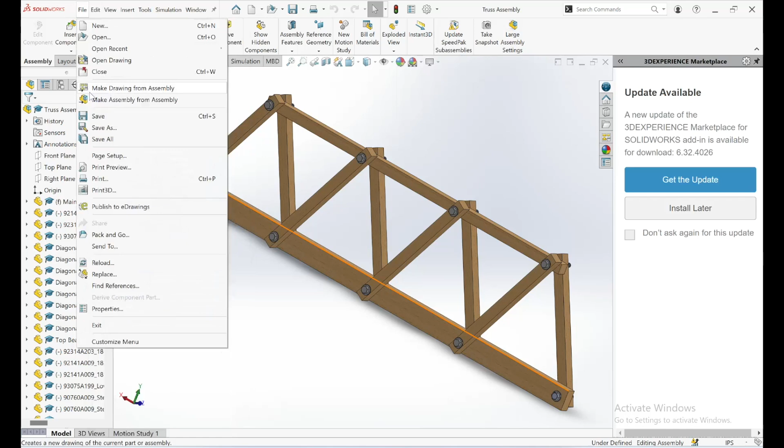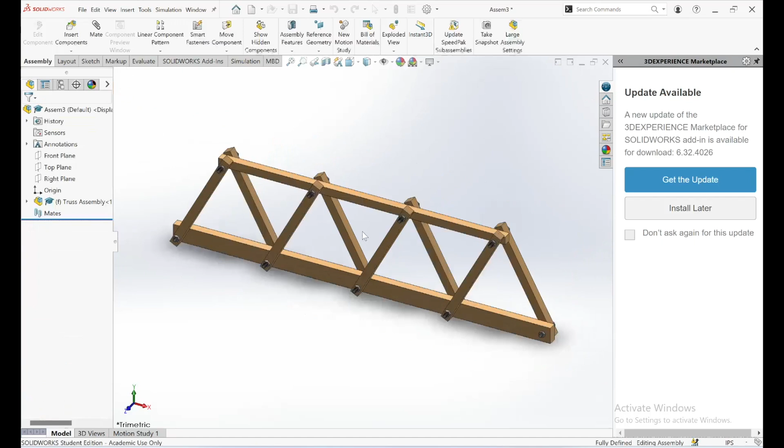So we're going to go up to File and click Make Assembly from Assembly. Once this loads, we should be able to drop the truss assembly that we had already built in the other file into the workspace. So let's go in and add another one. Select truss assembly, and let's add it in over here and press OK.

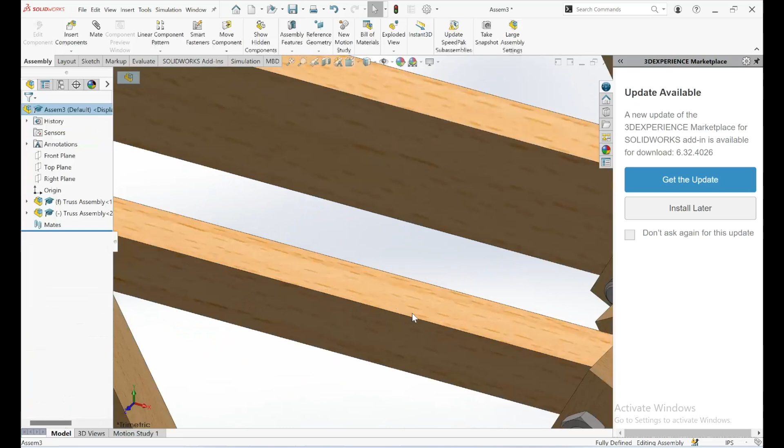Oops, so as you can see, these bolts are facing towards each other and we want them facing outwards. There's a couple ways you can do this. I'm going to start by rotating this side, clicking on the right side of my mouse and dragging, and this will give us a different view of the part.

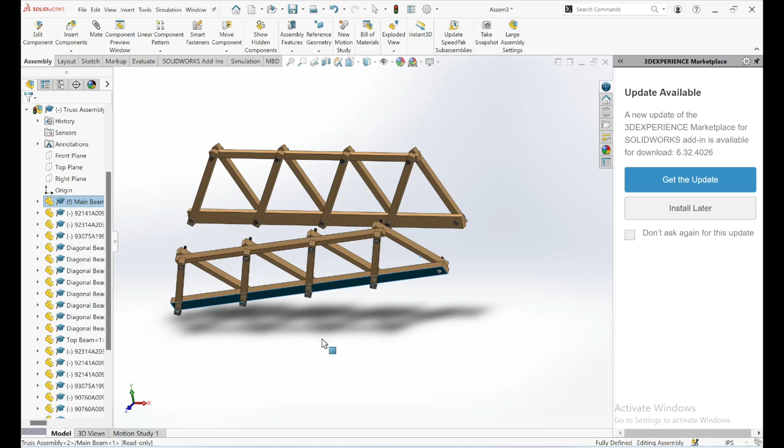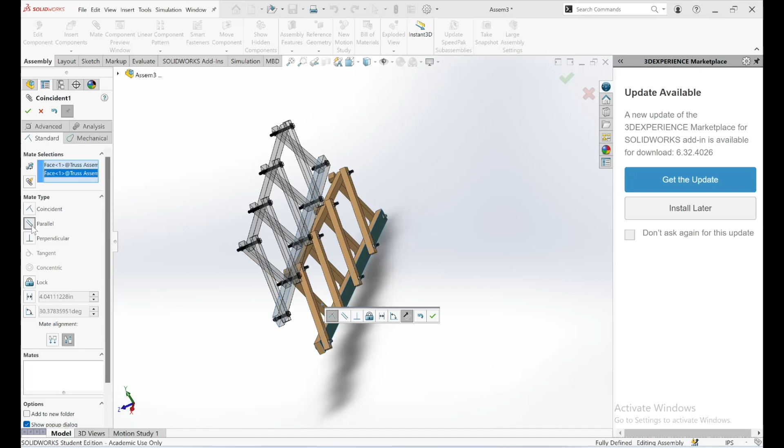Just so we can get it approximately where we want it to be, let's drag this out. Let's click this face here and mate it with the inside of the main beam on the other side of the truss. Now, one side of this truss is in fact fixed, so it won't move, but let's make this parallel, so then they'll line up like this. Click OK.

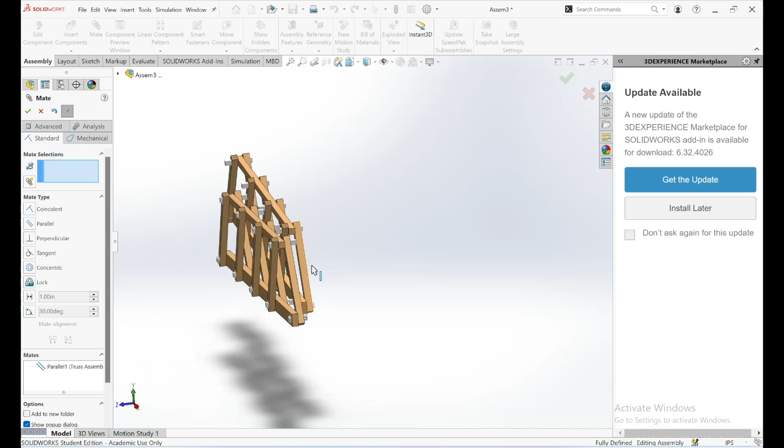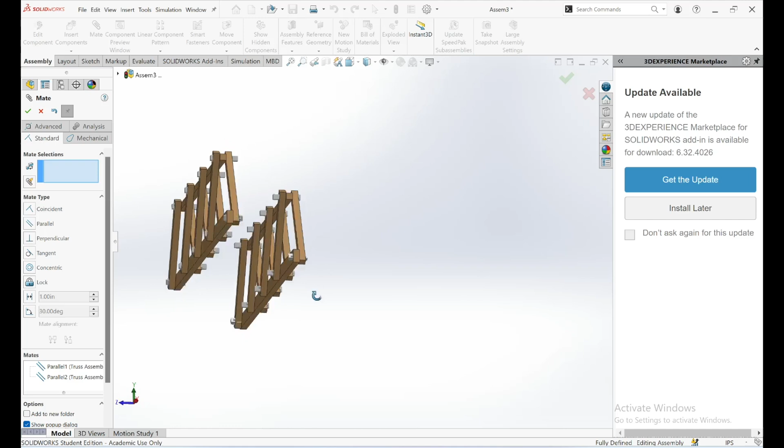And let's also click on these edges right here. Let's go to this edge, this diagonal, and this diagonal, and let's also press parallel for them as well. Accept. These now should be able to be dragged out, but it will still remain parallel and on the other side of the truss.

Okay, let's add some cross members in now. So let's go into Insert Component. Let's browse and select our top cross member. And place it.

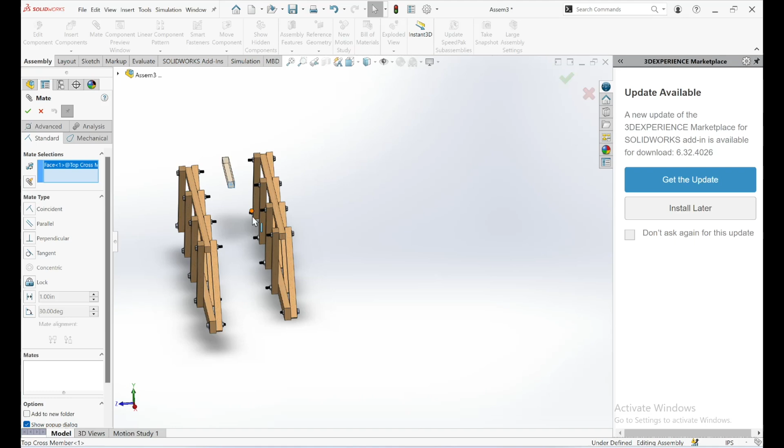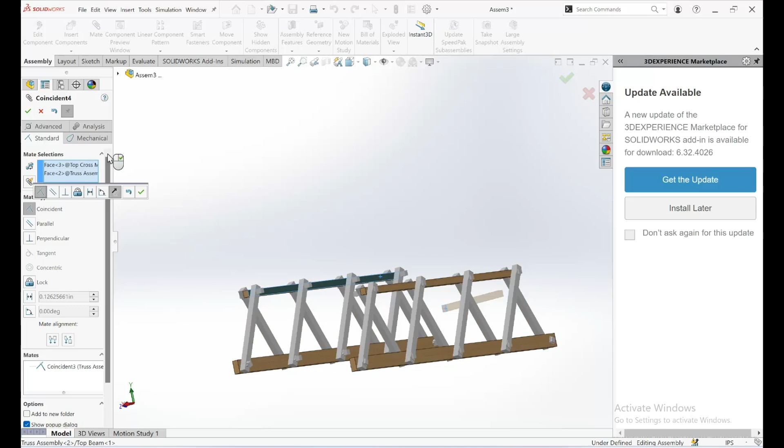Let's accept it and let's mate it to the top. Select that face right there. Let's zoom in and select the inner side of this top beam here. Make it flush, press accept, and let's do that for the other side as well. And that'll set our distance now.

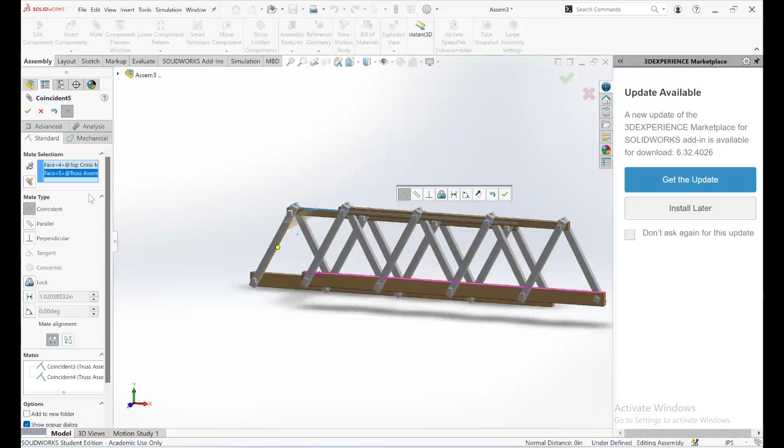Now, as you can see, it's kind of rotated, so let's fix that by clicking that top of the top beam, top of the cross member, and top of the top beam, and making it flush. Let's accept, and do it again for the other side as well - the top of the cross member and top of this.

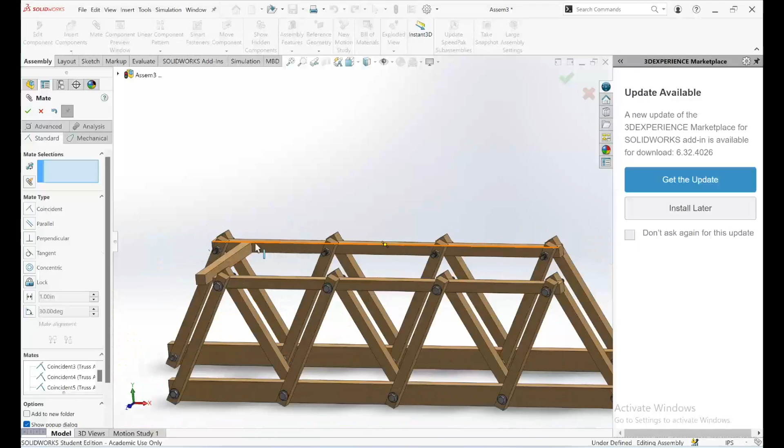As you can see, if you zoom in all the way, it will be flush like that. Now this is still able to move this way, so let's set a distance from this face to this face. It can be any distance of whatever you designed, but for the sake of this video, I'm just going to set it to 1.5. I'm also going to do that on the other end as well. Perfect.

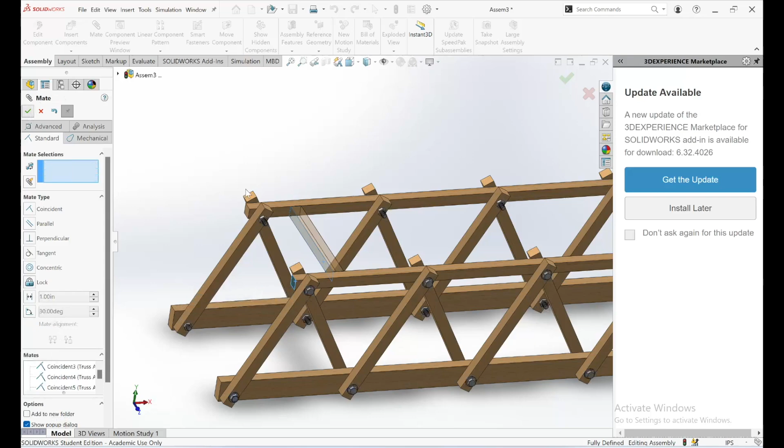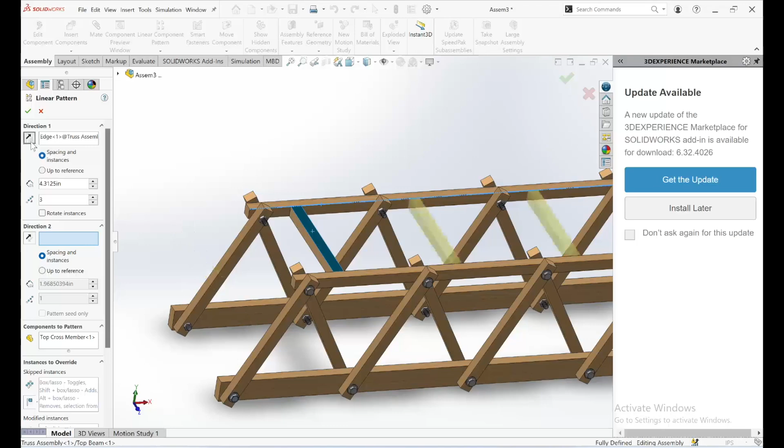Just like before, we can just do a linear pattern of this cross member right here, so let's just do that. Go up to linear component, let's select in this direction, let's flip it, and just say 3.

Actually, I don't like where that crossbeam is, and if you don't like it either, you can go ahead and go into the mates that we have, go into distance, and edit that feature. You can always go in and change it, so you don't have to delete the entire constraint or the entire mate - you can just go edit it.

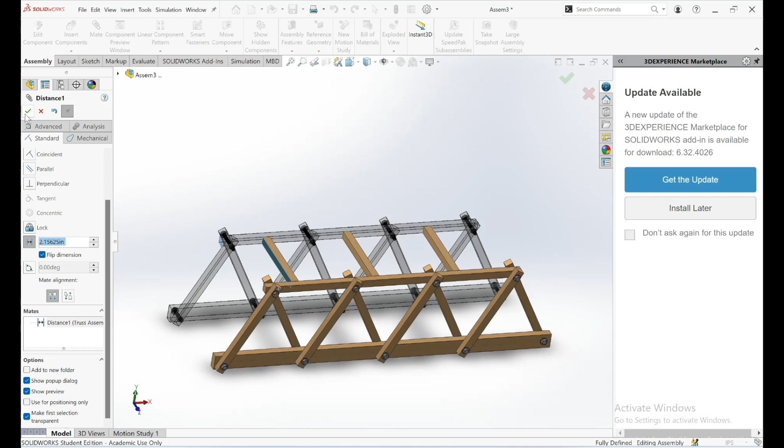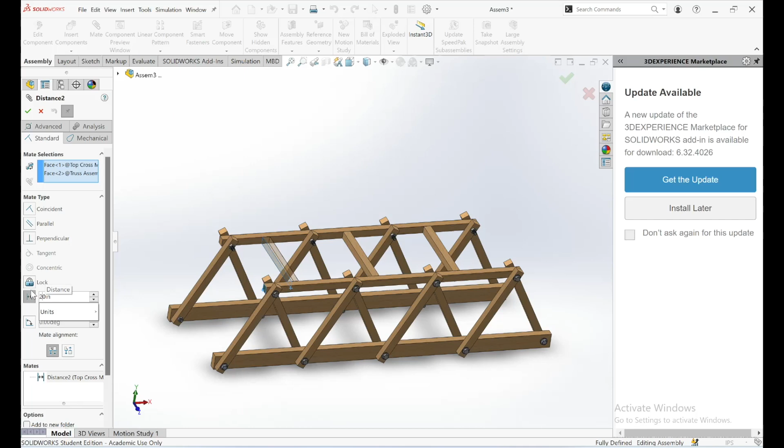So I'm going to do that and that one, accept, and I'm also going to do it on the other one. Edit, and accept. Wonderful, now we have our top cross members in place.

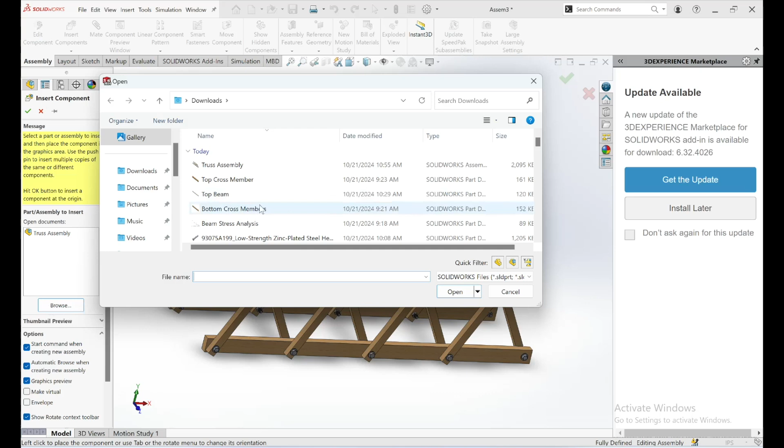Now let's add some of our bottom cross members. So just go ahead and browse. Let's open bottom cross members and place it wherever. And let's go ahead and add some mates so it can be put into place. Flip that. Accept.

It looks like my bottom cross member is a little bit long, so to fix that, I'm going to go into my assembly. I'm going to select - I'm going to scroll and look for where it says that part 5, or top cross member. We should probably check that one too while we're at it.

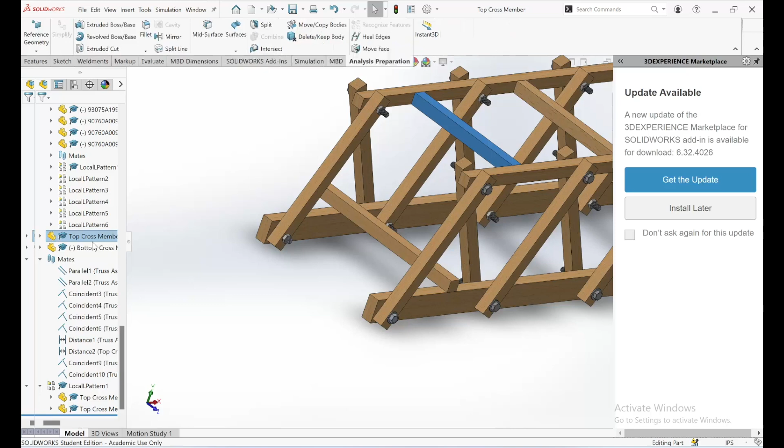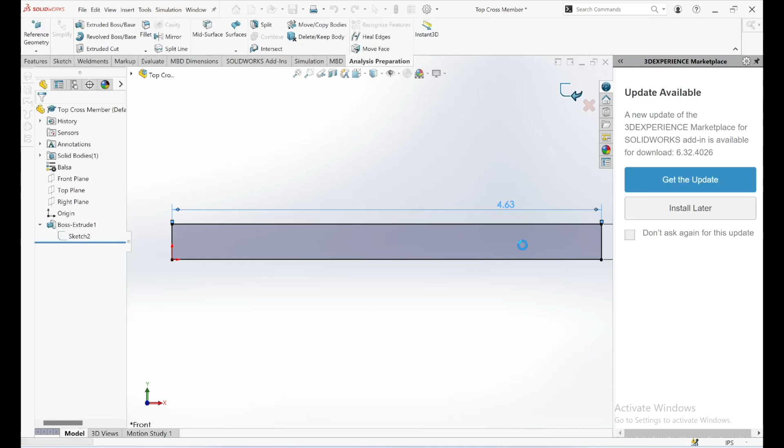You can go into SolidWorks and change your part in the assembly, and it'll automatically update in the assembly for you. So just for the sake of it, let's just change this top member to be this value and accept it. And then let's save it. And then in our SolidWorks assembly, it should give us a live update with the changed part.

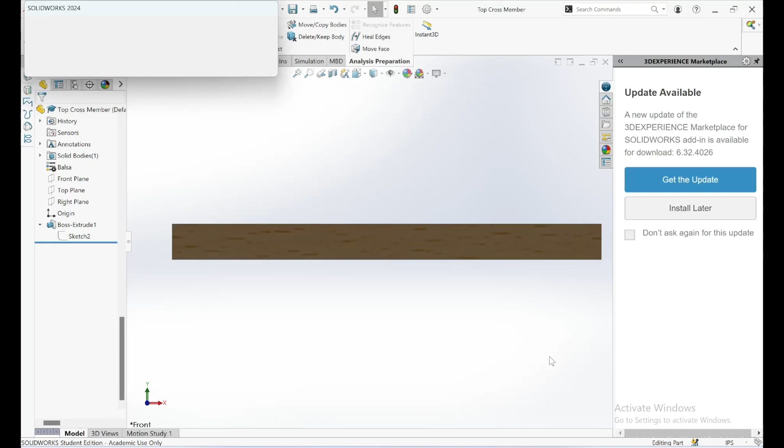It says the model's assembly has changed. You want to say yes, rebuild. Wonderful.

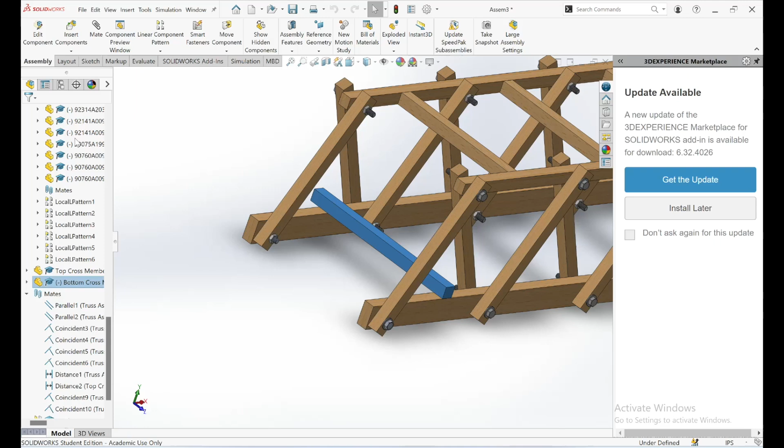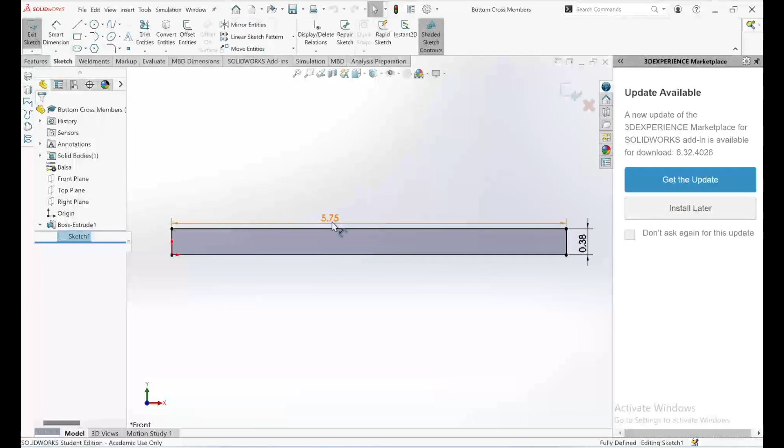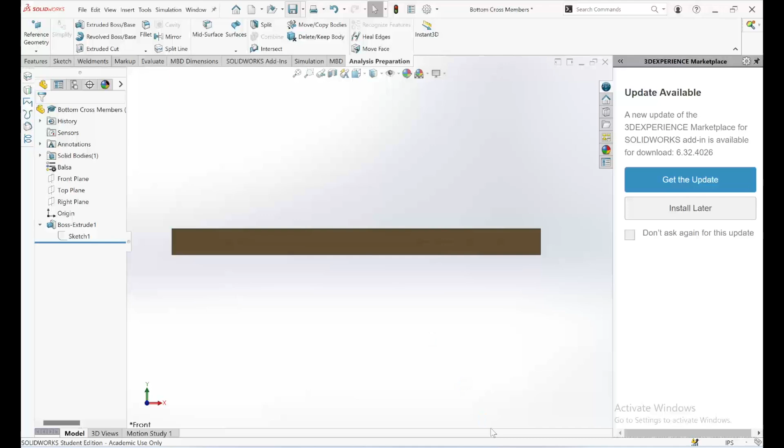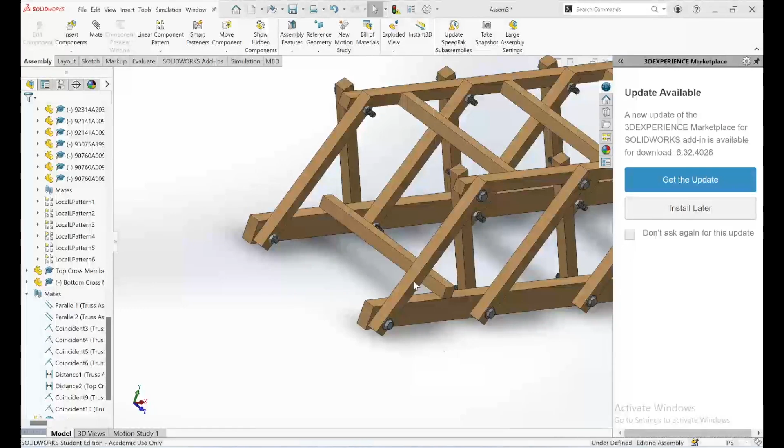It'll tell me some parts have been changed. Yes, I do want to update it. Updating. Wonderful, look at that now - everything has been updated in the assembly, and that's how you can edit a part in an assembly and have it update automatically in the assembly.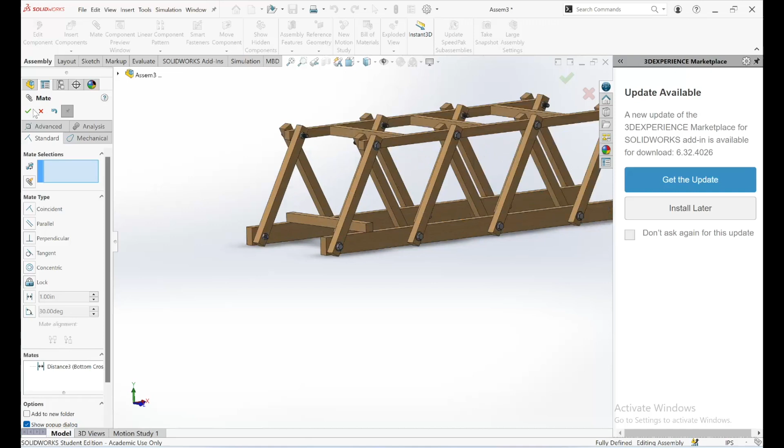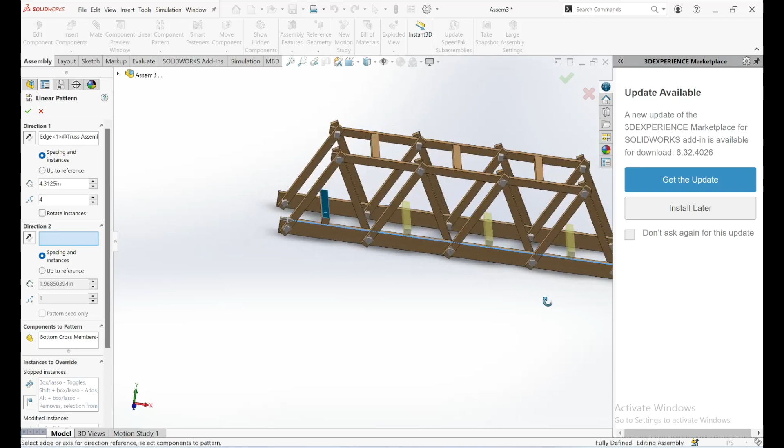That should be now fully defined. And let's just go in and pattern this component. Add one more instance. Wonderful.

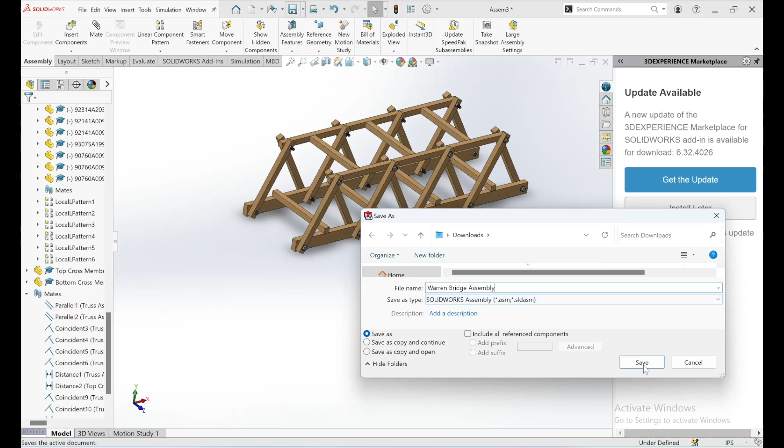All right, and there we have it, that is our fully assembled bridge. We can just go up here, click save. Keep in mind, we probably should have saved this a lot earlier. Warren Bridge Assembly, save. Cool. All right, I'll see you guys in the next video for the drawings.